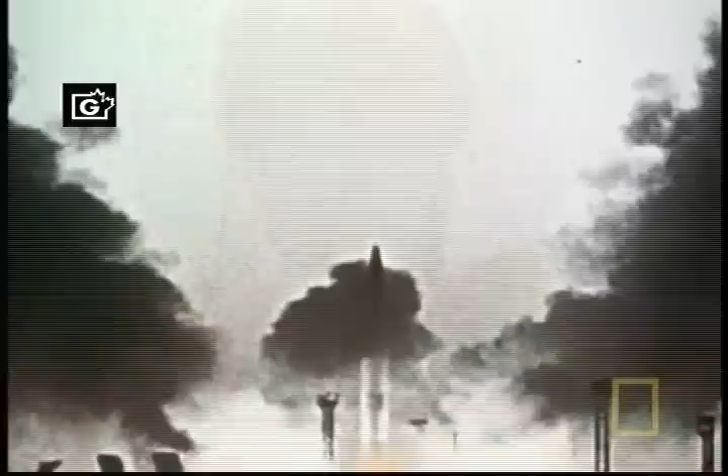It's one of the largest underground military command centers in the world, responsible for protecting the skies over North America, capable of monitoring enemy missiles around the globe, and in charge of deterring terrorists in the aftermath of 9/11. And it's buried deep inside a mountain.

This is NORAD, the North American Aerospace Defense Command Center. Its state-of-the-art computer systems are linked to a worldwide early warning network of satellites, sensors, and radar. NORAD's mission is to track all top-secret intelligence transmitted from this sophisticated warning system. But its top priority is to use that intelligence to monitor the skies for incoming strikes against North America, to assess potential threats, and coordinate a military response, giving U.S. forces enough time to intercept or shoot down the enemy.

Manning this megastructure are about 1,500 military and civilian employees from the U.S. and Canadian armed forces. Their motto is deter, detect, and defend.

The idea for a command center of this caliber first emerged during the tense nuclear arms race between the United States and the Soviet Union. The need for NORAD became critically clear on the 29th of August 1949, when the Soviet Union detonated its first atomic bomb at a test site in Kazakhstan. America's position as the world's leading superpower was now in jeopardy.

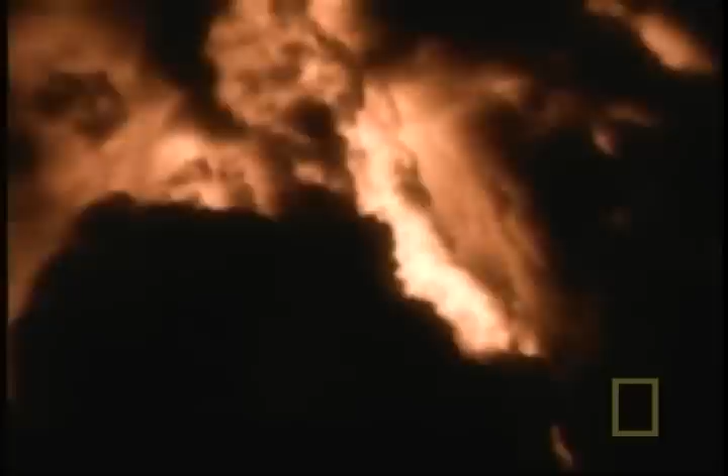To counter the possibility of a nuclear threat from the Soviets, the United States and Canada combined their resources to form the North American Aerospace Defense Command, or NORAD. By 1958, NORAD's detection system relied on a global network of 57 radar sites planted above the Arctic Circle. This was called the Distant Early Warning Line, or DEW line.

But NORAD's nuclear defense had an Achilles heel: the headquarters itself. NORAD was operating out of an old hospital in downtown Colorado Springs. And although it was close to other military facilities, including a U.S. Air Force base, the building, built in 1923, was a vulnerable target.

The commander at the time said, 'There's a problem here. Anybody driving by with a bazooka could knock out this command center.' Military officials were forced to rethink the location of NORAD's headquarters. They needed a protected site and a structure that would be virtually indestructible.

The Army Corps of Engineers was brought in to design a state-of-the-art military fortress. We needed something that would be able to survive a nuclear attack so that we could respond in kind, and the Soviets would know that, and therefore, hopefully, not attack us in the first place.

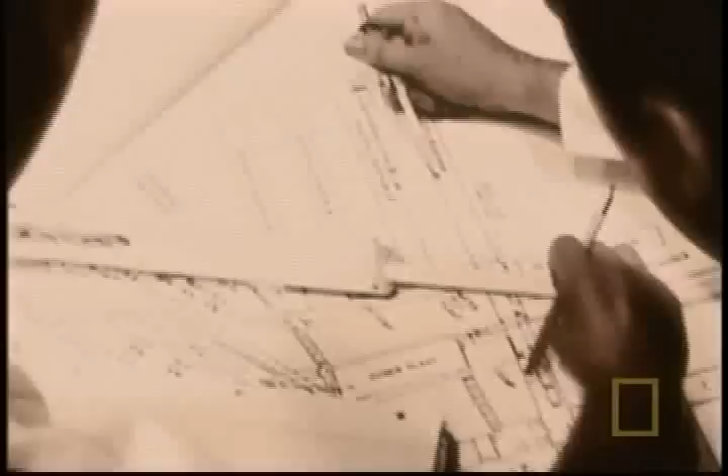The Army Corps of Engineers had been the mastermind behind the Pentagon military complex 17 years earlier, and America's top-secret missile silos in the 1950s. But the concept for this mountain complex came at a time when engineering technology was relatively unsophisticated and limited. In 1958, computers, as we know them today, had yet to be invented. The engineers used slide rules when they built this facility.

The military designers proposed 3 potential locations for the megastructure. They could dig out a concrete underground bunker, like those constructed during World War II. They could erect NORAD inside an abandoned mine. Or they could implement their most extreme design by carving out the inside of a mountain.

2,000 feet of natural solid granite protection convinced the engineers to build NORAD deep within a mountain. The next step was to find that mountain. They began the search in their own backyard, the Colorado Rockies. And soon engineers had narrowed the choice to 2 sites.

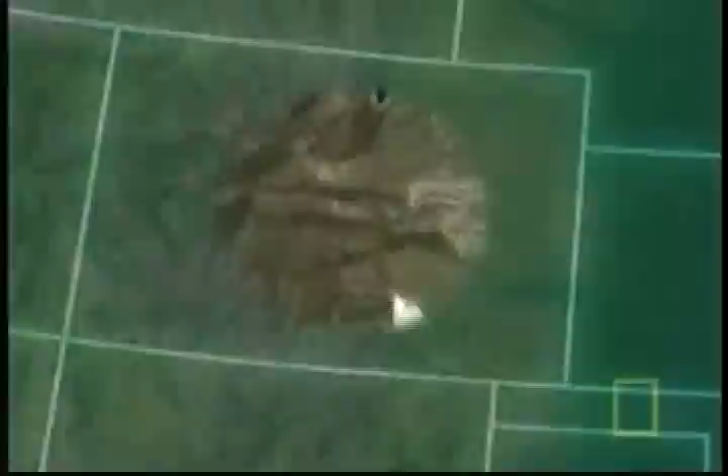The 9,423-foot-high Blodgett Peak and the 9,565-foot Cheyenne Mountain. To ensure they selected the best option, engineers analyzed rock core samples from each mountain, a process that could determine which one would offer the sturdiest protection for this unique underground megastructure.

Helicopter pilots were hired to transport men, generators, and heavy core sampling equipment to the sites. At each location, survey crews drilled holes 3 inches in diameter and up to 1,600 feet deep. Then, using a borehole camera, they photographed the rock structure inside the 2 mountains.

When they did the core samples in Blodgett Peak, they discovered that there was a lot of water compared to Cheyenne Mountain. They had much harder rock and much more consistent rock in Cheyenne Mountain. Because it had a more stable rock structure, Cheyenne Mountain was selected as the future home of NORAD.

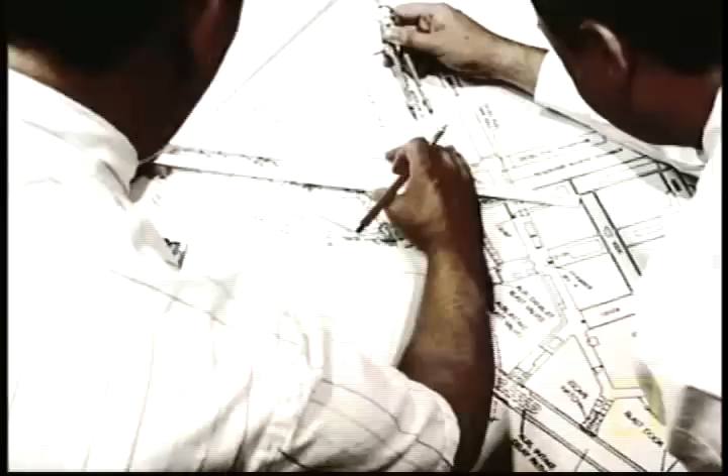Engineers now had to map out the construction project. Phase 1 was excavating tunnels, chambers, and reservoirs inside the mountain to create a 5-acre military installation, big enough to hold 5 football fields. Phase 2 was to build a self-supporting city with 12 interlocking personnel buildings and its own water reservoirs, fuel supply, power plant, and ventilation systems.

Like the Pentagon, this city would be open 24 hours a day. Staff would be stationed at roughly 800 desks and operate about 1,000 computers.

NORAD would also contain amenities like a gym, corner store, and cafeteria. Many of the building's exact details remained under wraps due to the high security protecting this top-secret facility.

But there was one characteristic that set this headquarters apart from other megastructures: the ability to completely seal itself off in the event of a nuclear attack. NORAD would have to be able to function and keep its personnel alive for 30 days without any support from the outside world.

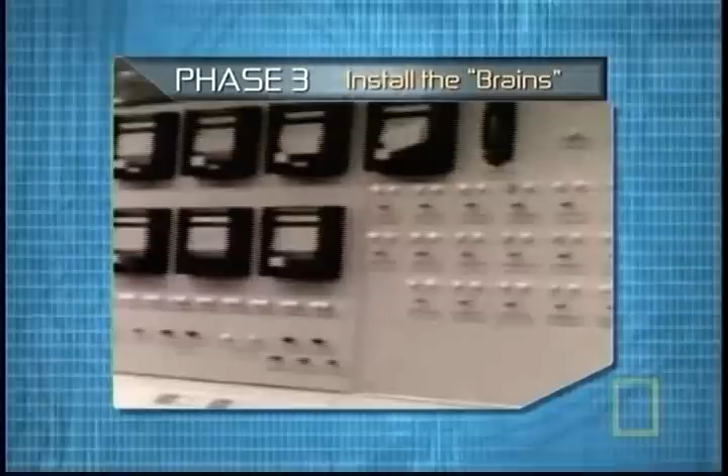For Phase 3 of the NORAD military complex, technical engineers would install a powerful scientific computer linked to a super surveillance system capable of monitoring missile activity around the globe. NORAD was considered a Level 1 facility, meaning this structure would have the highest operational security available.

Building this military headquarters presented a challenge unlike any that engineers of the time had previously faced. 700,000 tons of granite had to be excavated from inside the mountain, a weight equal to almost 4,000 commercial jets, before construction of the buildings could even begin.

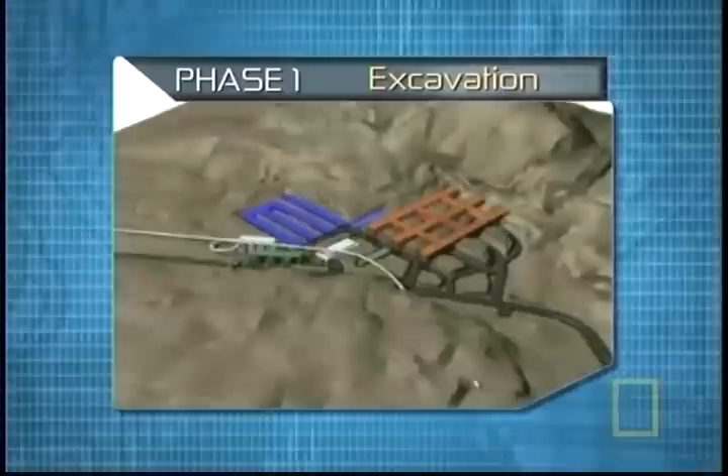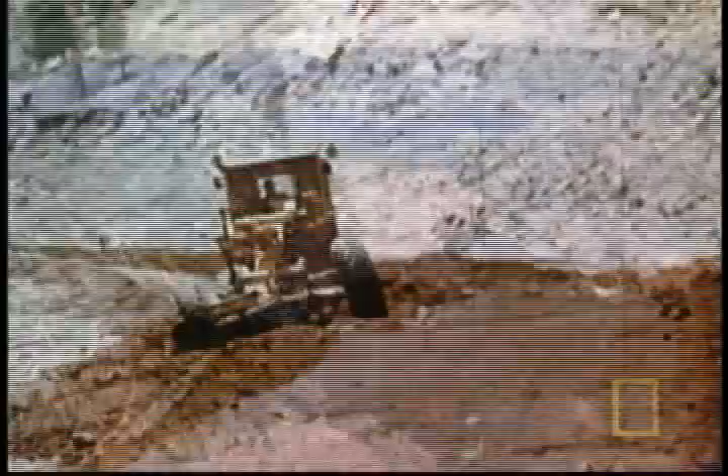By late September 1959, 2 years after the initial conception of NORAD, construction crews hit their first obstacle. Engineers had positioned the North Tunnel entrance 1,000 feet above the base of the mountain. But the site was so remote that men and machinery couldn't access it by land. A 4-mile-long road had to be planned and bulldozed before crews could start excavating the mountain.

It took more than 2 months to complete the road, from its beginning in Colorado Springs to the end point 1,000 feet up Cheyenne Mountain. But by November 1959, just as the new road was almost ready to transport crews and equipment, the entire project came to a screeching halt.

The roadblock this time was money. Congress didn't approve additional funds for NORAD. At the beginning of 1960, with the threat of nuclear war still a frightening reality, it looked as if America's answer would never be built.

In November 1959, all across the United States, Americans were living under a nuclear threat. The US government was building what it believed was America's only viable solution: a top-secret military complex capable of seeing into every corner of the world.

But construction crews had only just finished the $1 million access road when the government shut down the entire project. Estimates to complete the project ran at more than $26 million. Military officials were constantly updating and resubmitting NORAD's initial plans.

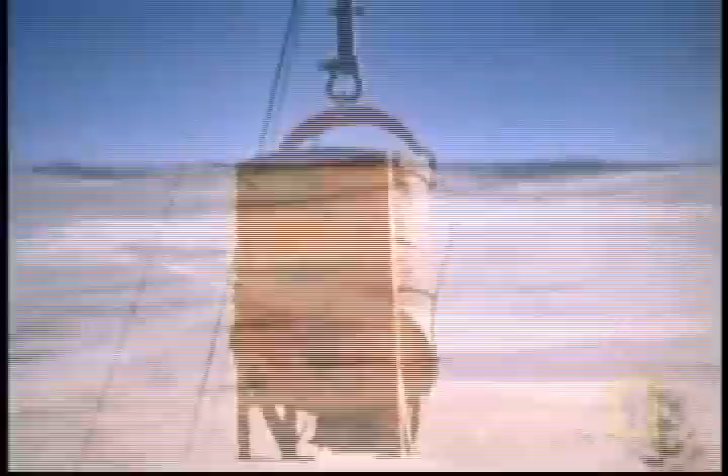It was another 16 months before Congress finally approved the design and funding of this underground megastructure, and construction could begin again.

Once the green light was given, military officials staged a highly public groundbreaking ceremony for their top-secret fortress. This was a message to the Soviets that the United States was taking the threat of nuclear war very seriously.

There was no secret. What was secret at the time, and remained secret really up until the 1980s, was exactly how hardened that facility would be. What kind of a nuclear blast could it survive?

On the 16th of June 1961, top military officials detonated the first blast. 3 interrupted years after NORAD's preliminary design had been drafted, construction finally began. It started with a mammoth dig.

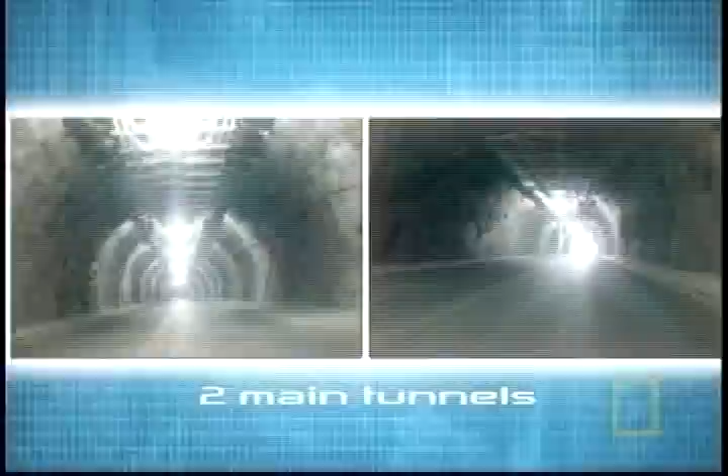A crew of just 90 workers had 1 year to carve out 5 acres and remove 700,000 tons of granite to form 2 main tunnels and 7 60-foot-tall caverns, the equivalent of 5.5 stories.

These hollowed-out chambers would become the protective shell for NORAD's 12 interlocking staff buildings and 3 industrial structures, including a power plant. The total size would be 104,980 square feet. The 2 tunnels would lead to these buildings from opposite sides of the mountain. The first job for the excavation crew was to blast out the tunnels.

From day one, engineers faced one of their biggest hurdles: how to keep thousands of tons of rock and debris from burying the whole project.

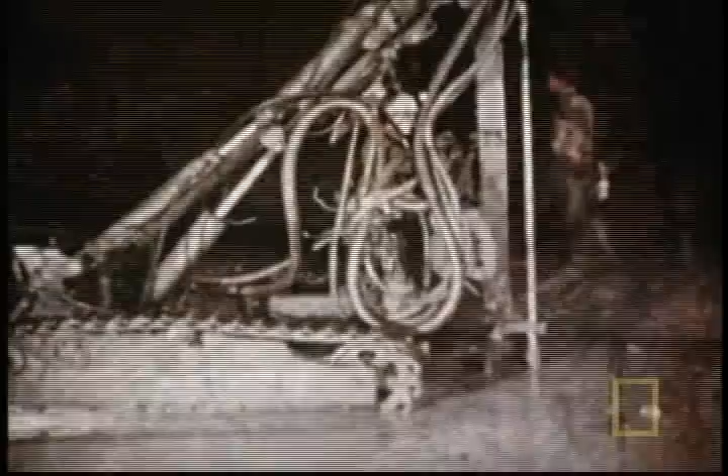Blasting was the fastest and cheapest way to excavate the granite. Miners at NORAD attempted traditional blasting techniques, with dynamite heavily packed into drilled holes. But they soon realized that this method risked fracturing and loosening the rock. In the worst-case scenario, it might cause the cavern ceiling to come crashing down on top of them.

Crews needed to develop a more controlled way of blasting that would keep the walls intact.

Dr. Paul Worsey is a blasting expert who consulted on the NORAD megastructure.

Worsey shows how the traditional blasting method can cause a rock wall to crumble and cave in. All these fractures here are blast-induced, and it's really loosened up. I can even pull the material off with my hands quite easily.

Now, if I could do that with a steel bar, just imagine what the shockwave from a nuclear weapon could do.

To avoid a cave-in, NORAD's explosives team used a new technique developed in 1956 called smooth wall blasting. In this technique, miners first calculate a blasting pattern by painting a series of arched lines on the granite walls. Holes are then carefully drilled along those lines and loosely packed with small sticks of dynamite. Timing is crucial. Each arch must be detonated from the inside out in a precisely choreographed sequence. On the outer arches, the rock shears off cleanly, leaving behind a smooth wall.

Dr. Worsey demonstrates NORAD's smooth wall blasting technique. With everyone at a safe distance from the site, the countdown begins. Fire in the hole! 3, 2, 1!

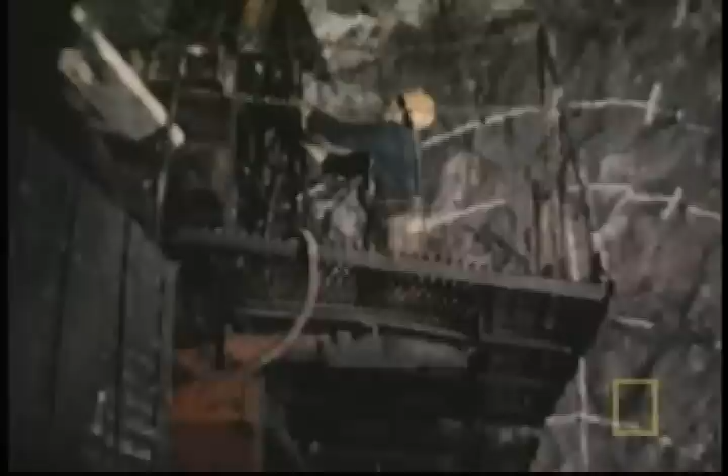Fewer cracks means a more stable wall, which was exactly what NORAD's blasters and engineers finally achieved at Cheyenne Mountain in the autumn of 1961. If they had not used these very innovative, carefully planned mining and blasting techniques, the chances of having a facility that would survive a nuclear blast would have been minimal.

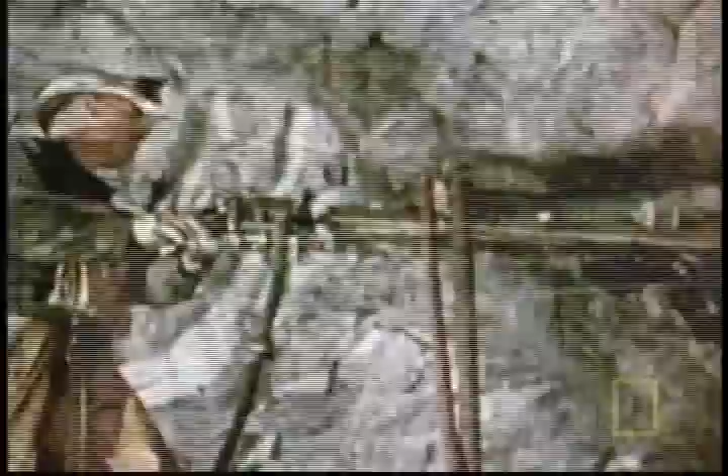The excavation crews still had to meet their deadline of June 1962. So blasters worked in 3 shifts around the clock, 6 days a week, attacking the mountain from both ends. The design plan called for the 2 tunnel crews to meet at a central juncture point. There they would excavate the main cavity for NORAD's 15 buildings.

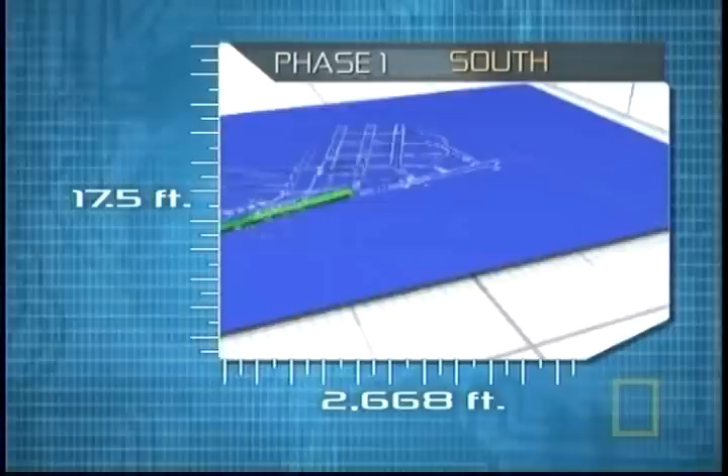On the south side of the mountain, one team bored the access tunnel for NORAD's ventilation system. It was 2,668 feet long and 17.5 feet high. On the north side, another team blasted out the megastructure's main entrance. This was a shorter tunnel, 1,416 feet long and 22.5 feet high.

Blasting, digging, and carving out tunnels thousands of feet long through a mountain took time. No one knew for certain if the command post would be completed before there was a Soviet attack.

On the 13th of August, 1961, the Soviets started to build the Berlin Wall. And 3 weeks later, they began to test a whole new generation of nuclear bombs. The workers at NORAD were now in a race to deter a hostile superpower.

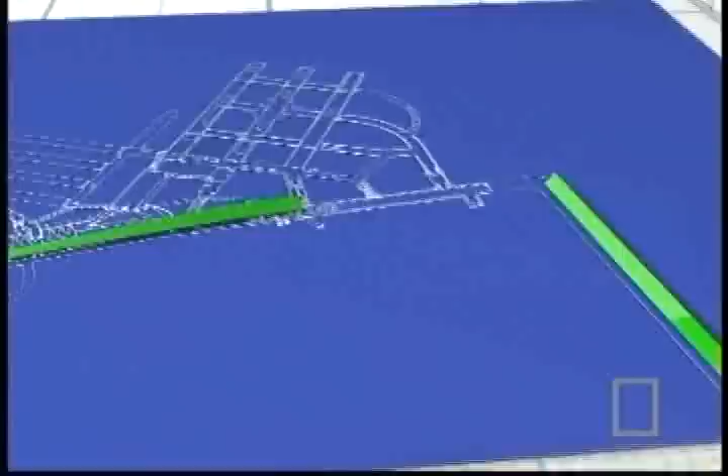Just 3 months after their start date, the workers reached a milestone. On the 7th of October 1961, crews from the north and south tunnels met. Together, they'd carved through 4,675 feet of solid granite. It was a monumental achievement.

But the tunnels were just the prelude to the main event. Digging out NORAD's 7 central chambers would be an even tougher job. And the crew had just 8 more months to finish the entire excavation. It was a daunting task.

And in the heart of the mountain, where the chambers would be hollowed out, engineers were about to hit another major obstacle, one that would threaten to derail the entire multi-million-dollar project.

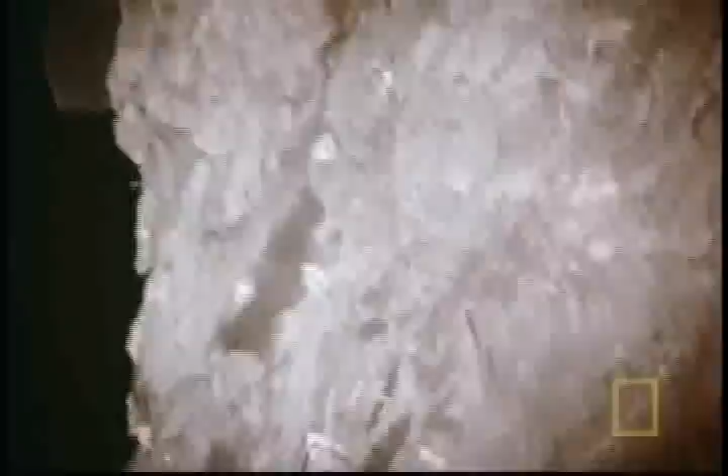On the 30th of October 1961, the Soviets tested the most powerful atomic weapon ever built. It was the 57-megaton Tsar Bomba. Nearly 4,000 times more powerful than the bomb dropped on Hiroshima 16 years earlier.

The blast had repercussions halfway around the world, at Colorado's Cheyenne Mountain, where engineers were constructing a command post that had to be able to withstand a nuclear blast.

Working around the clock, construction crews had carved out more than 6 million cubic feet of rock for NORAD's 7 central chambers. But 3 months into the dig, engineers uncovered a dangerous weakness in the mountain's geological structure.

What they discovered were huge fractures above the 3 main chambers, meaning that even the vibrations of a small earthquake could potentially cause the entire cavern to collapse.

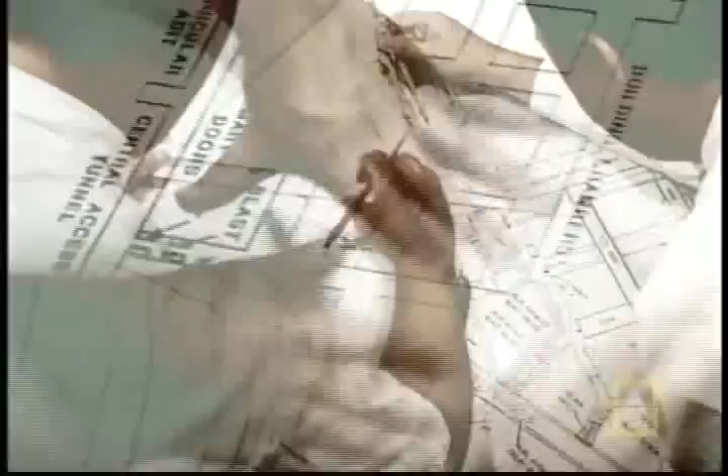Engineers needed to address this new risk or terminate the entire project. They went back to the original blueprints and came up with a radical proposition. They decided to rotate the chambers 70 degrees and reposition the entire excavation project. In this new design, the cracks over the future buildings became shorter, minimizing the effects of an earthquake or nuclear blast.

If they had not changed from the original plan for that portion of the excavation, it's likely that you would have had problems with caving rock, or if there had been a nuclear attack, the vibrations to the entire mountain would cause that to collapse.

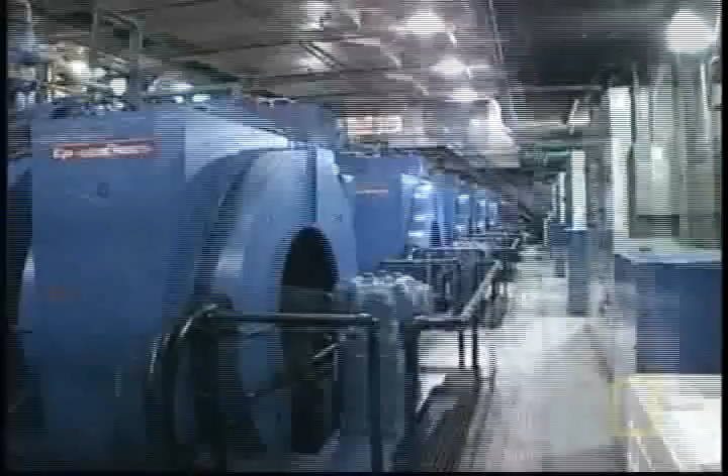With the revamped design complete, construction crews were now ready to carve out the 5 reservoirs. 4 of the reservoirs would hold a total of 6 million gallons of water, enough to fill more than 20 Olympic-sized swimming pools. The fifth reservoir would hold 500,000 gallons of diesel fuel. The surplus would run the 6 generators that provided NORAD's power.

With the reservoirs complete, construction crews were just a few months away from their June 1962 deadline for excavation. But soon the mountain's natural elements presented another challenge for NORAD's blasters. Engineers discovered that large sections of the mountain were filled with water, so much that the miners couldn't possibly pump it all out.

Too much water is a nightmare for blasters, creating fractures in the rock. And miners have no control over the way fractured rock explodes. The miners were forced to find another type of explosive.

They tried out a compound called slurry, made from ammonium nitrate. Slurry can be molded to fit any crevice, so it can fill a hole that's cracked.

But blasting away tons of rock would weaken the mountain's structure. So engineers decided to secure NORAD's unstable granite roof with giant steel rods called rock bolts, measuring between 6 and 32 feet in length, these metal dowels would provide critical structural support.

Rock bolts are really important in tunneling because they're a method of stabilizing the roof. We actually pin loose pieces of roof to stabilize them.

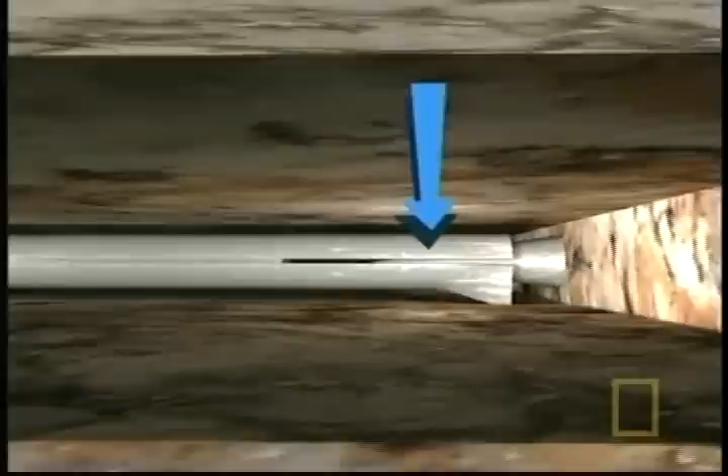Workers installed the steel rods into the walls and ceilings of the chambers. The tip of each bolt had an 8-inch split that held a steel wedge. Compression drove the wedge into the steel rod, spreading its tip and anchoring the bolt against the surrounding rock.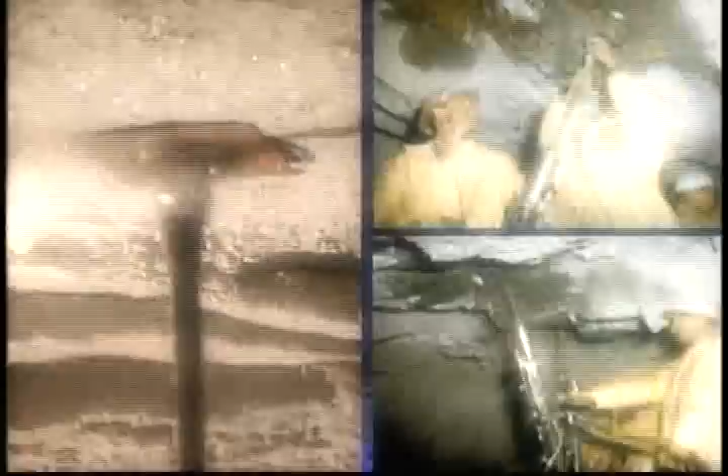Crews inserted bolts 4 feet apart throughout the chambers and tunnels. Each bolt was then tightened against a steel plate on the surface of the rock.

But as the miners continued to carve out more chambers, they discovered that another natural element was also weakening the rock cavern around them: volcanic rock called basalt. Softer than granite, basalt deteriorates and falls apart when exposed to air.

So the miners decided to spray the rock with a concrete mixture called gunite. This hardens into a solid wall and would therefore prevent the basalt from deteriorating.

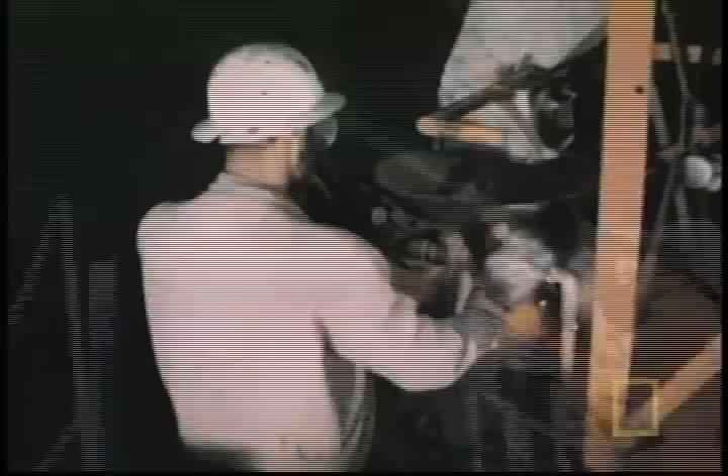With all these unexpected complications, the construction crew struggled to stay on schedule. People were working 6 days a week, basically around the clock, and they knew that national defense, possibly national survival, depended on doing this job quickly and doing it right.

Finally, on the 18th of June 1962, just 2 days after their deadline, workers finished the dig. Phase 1, excavating the mountain, was complete. Almost 1 billion pounds of rock had been removed from Cheyenne Mountain, enough to fill 23,000 dump trucks.

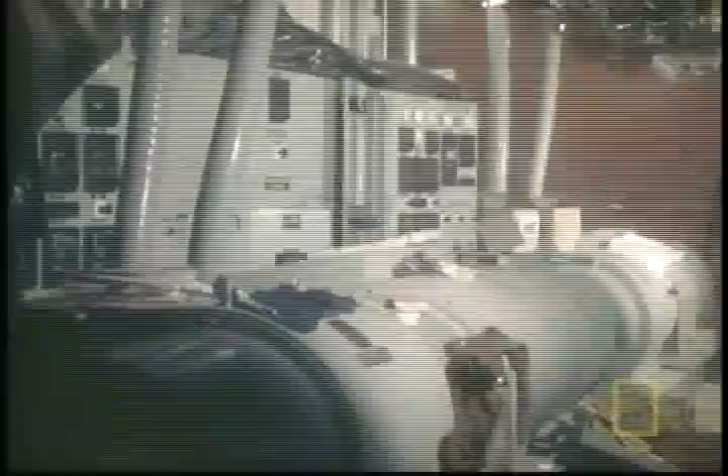Engineers were now ready to start Phase 2 of the monolithic megastructure, constructing NORAD's 12 personnel buildings and 3 industrial structures. 6 generators and a complex ventilation system would also have to be installed inside Cheyenne Mountain.

But what the engineers didn't know was that their plans were about to be turned upside down by the unexpected fallout from a dangerous new weapon.

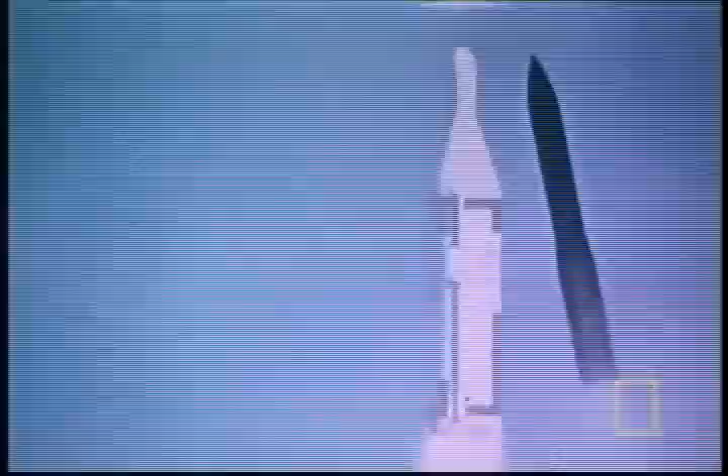By July 1962, construction crews working 2,000 feet inside Colorado's Cheyenne Mountain had carved out more than 5 acres of granite to make way for one of the most important megastructures in military history. Engineers had already completed the designs for 15 buildings that could withstand a nuclear blast. The NORAD Mountain Fortress would be America's first line of defense against enemy threats.

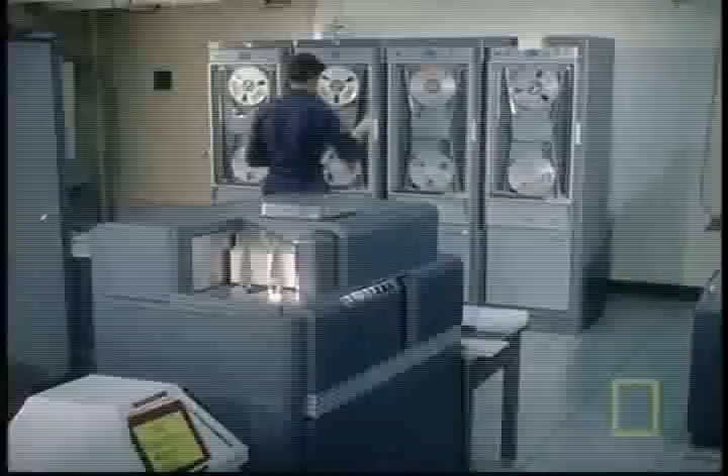But new advances in weapons technology were threatening to neutralize the whole project. On the 9th of July 1962, more than 200 miles above the Pacific Ocean, the US detonated a high-altitude bomb in a nuclear weapons test.

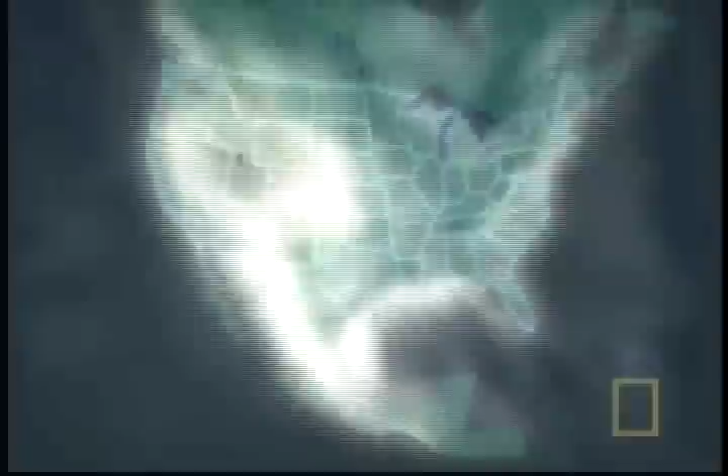An unexpected byproduct of this explosion was a newly discovered phenomenon called an electromagnetic pulse, or EMP. An EMP generated 200 miles above Kansas could cripple the entire United States by preventing electronic devices from functioning. And NORAD depended upon electronics operating around the clock to successfully accomplish its mission of surveillance.

Back at Cheyenne Mountain, engineers realized that even thousands of feet of granite would offer no protection at all against an electromagnetic pulse. The one substance that could ward off the destructive pulse was metal.

Like a lightning rod, metal directs electromagnetic pulses to the ground. But shielding all of NORAD's wires and computers in metal was impossible. If there was even a single gap in the shield, the pulse could short out the entire complex.

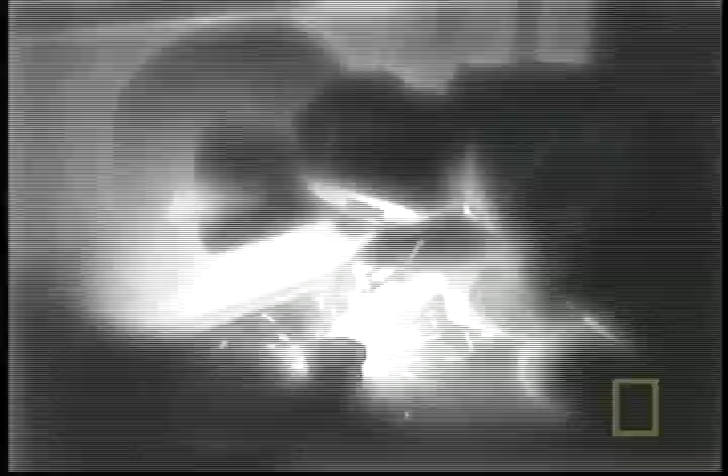Just as engineers prepared to erect NORAD's buildings in February 1963, they came up with a solution. They would construct the buildings themselves entirely out of metal to ground the path of the pulse. Thick steel walls were brought inside the structure in sections, the only way to fit them through the tunnel opening. Once inside, they were welded together at the seams. These steel walls would protect NORAD's sensitive electronic systems by transferring an incoming electromagnetic pulse through the metal to the ground, where it would be absorbed and neutralized.

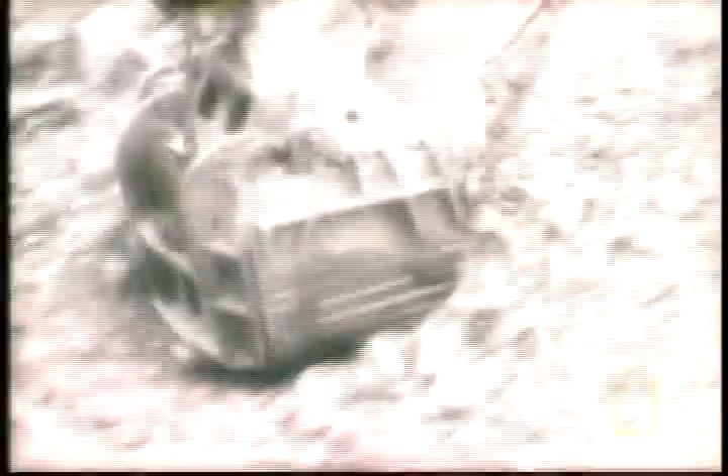Actual construction on NORAD's steel buildings began in March 1963. But 7 months later, the engineers hit another wall. They determined that a geological fault in the roof of the main chamber would not withstand a nuclear detonation.

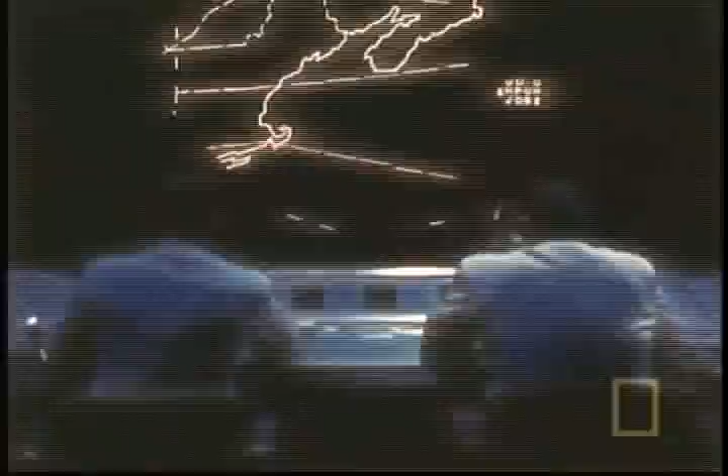They thought this problem had been solved when they'd pivoted the planned structure almost 2 years earlier during the excavation phase, but they were wrong. Even though they reoriented the complex, there was still a crack over part of it, and that caused a great deal of concern. Under this crack was the proposed site of NORAD's most important building, the command center, home to crucial monitoring and surveillance systems.

So engineers came up with a new plan. They would install a giant concrete shell, 50 feet in diameter, just inches below the main chamber's granite ceiling. Its purpose would be to prevent NORAD's future 3-story command center from being buried under tons of crumbling rock. The enormous dome, ranging from 4 to 14 feet thick, was made from steel-reinforced concrete. It would be supported by 4 massive 3-story high concrete columns.

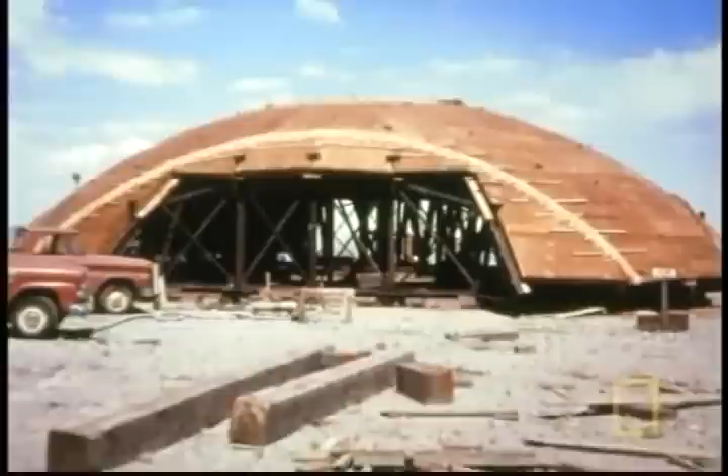It was so large that it had to be fabricated outside the mountain and transported through NORAD's tunnel entrance in pieces. Workers used hydraulic jacks to reassemble it inside the mountain, lifting it into place on top of the columns. To stabilize it further, the dome was fused to the cavern's ceiling. 6 months later, the dome was assembled and in place.

The construction of NORAD's main buildings was now the top priority. But there was still one other menacing phenomenon to tackle. In a nuclear blast, the mountain would transmit shock waves directly to the buildings, injuring people and damaging sensitive computers.

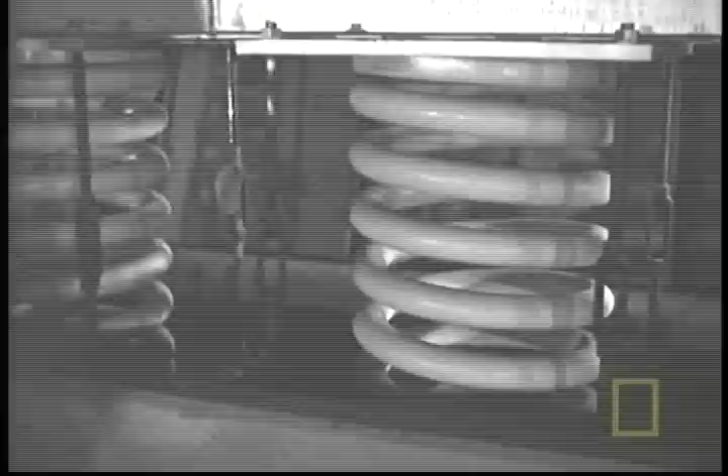To combat these waves, engineers came up with their own version of shock absorbers: giant springs 3 feet tall, nearly 2 feet wide, weighing half a ton each. 1,319 springs would protect NORAD's buildings from shockwaves. This was a first in engineering history. No other structure had ever employed such an innovative shock absorption technique.

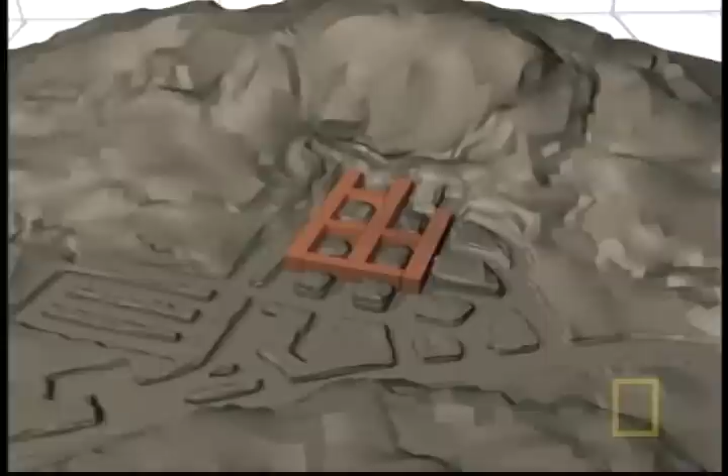Step by step, work on the rough steel structure of NORAD's interior buildings continued. When complete, the buildings were all interconnected to form a basic grid pattern. It was inside this building, the Command Operations Center, that technicians eventually installed the brains of NORAD, its global surveillance system. In adjoining buildings, workers constructed other features of the megastructure, including a medical clinic and a shop.

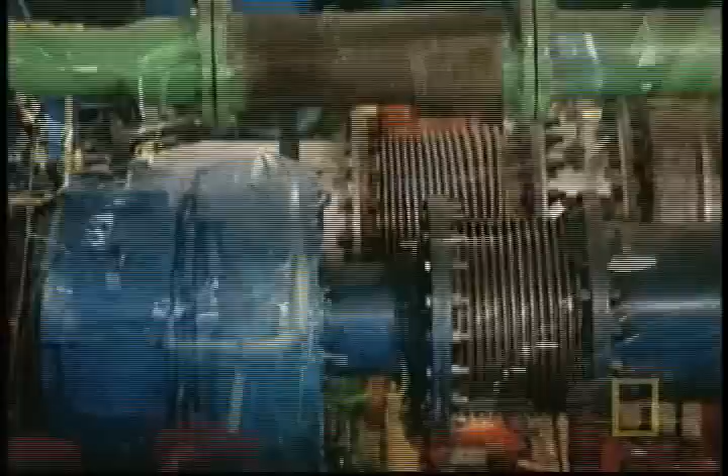In April 1964, workers were 14 months into building NORAD's self-supporting city. The 15 buildings were complete, and crews now began work on the support systems. First, they built the power plant that would run the entire command post. At its heart were 6 turbocharged diesel engines, the same kind used to power battleships. Together, they could generate 10 megawatts of electricity, enough to power more than 1,000 households.

Next, crews loaded fuel and water into the 5 reservoirs they'd already carved out. One reservoir held 1.5 million gallons of water for drinking and cooking.

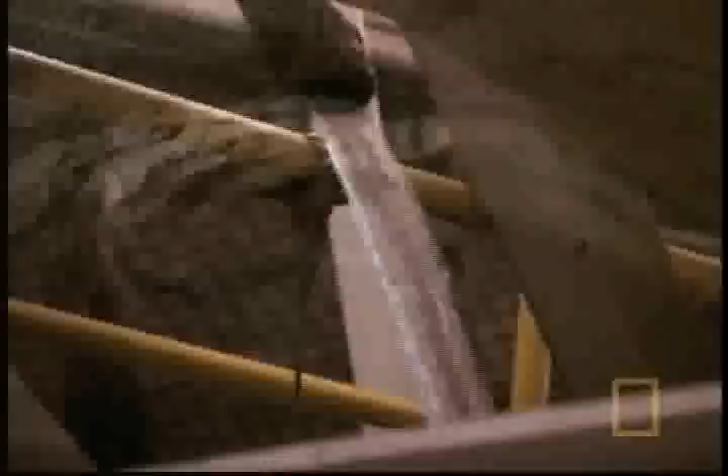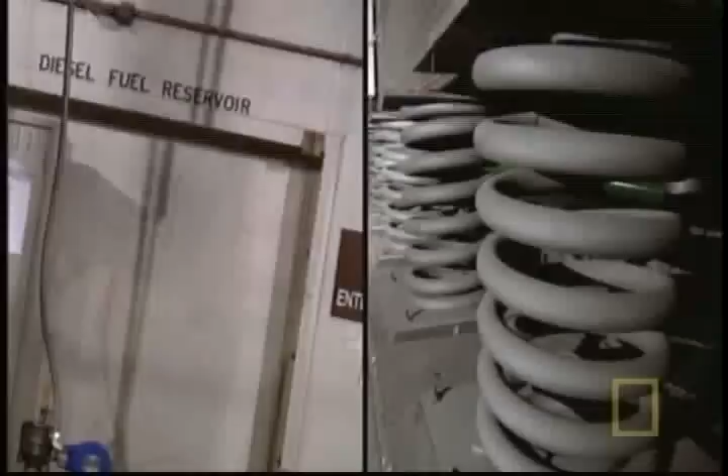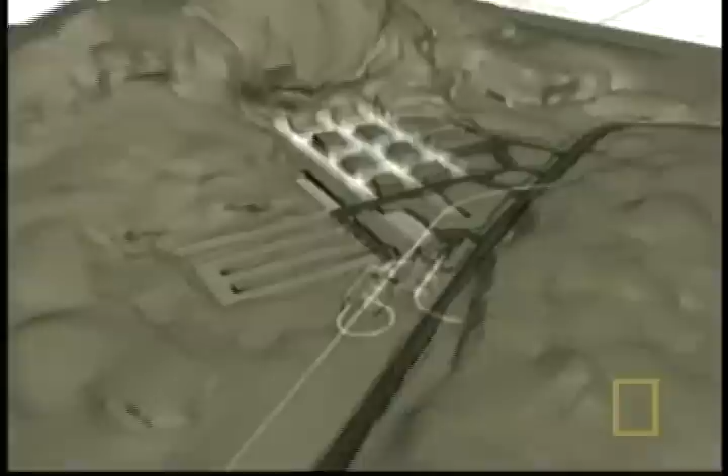In the 3.5 years since NORAD's first official blast of dynamite, workers had overcome all kinds of obstacles. But the NORAD facility was still vulnerable to one lethal menace: radiation from nuclear fallout. By early 1965, the first 2 phases of the NORAD command center were near completion. The tunnels, interlocking buildings, 4 water reservoirs, fuel supply reservoir, power plant, and ventilation system had all been constructed. But before the 3rd and final phase could begin, installing the technical equipment that would be the brains of this military megastructure, one last detail had to be addressed.

In the event of a nuclear explosion, damaging shock waves and thermal radiation could enter NORAD through 3 routes: the air intake delay ducts and the 2 tunnels. The tunnels were designed as blow-through areas, so shock waves would travel in one way and out the other. But the air ducts led directly into the NORAD complex. If a thermonuclear shockwave got through these ducts, it could destroy the buildings.

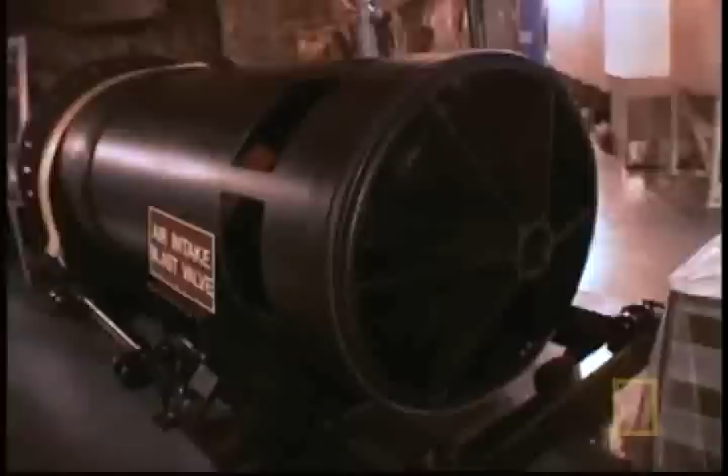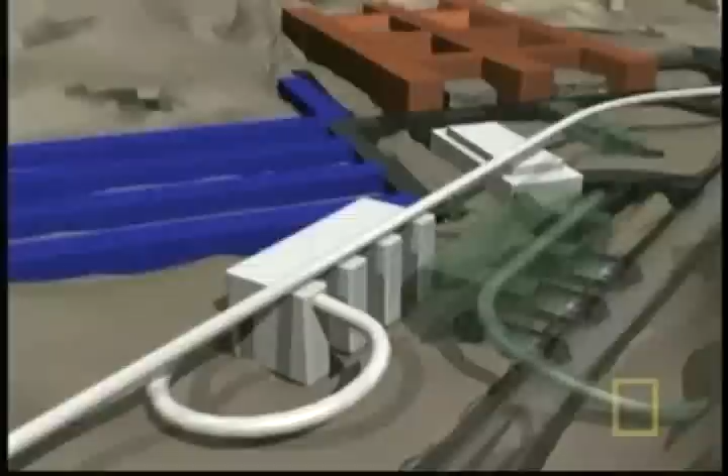The solution was to create a safeguard called a blast valve. NORAD has 58 of them, weighing 8,500 pounds each. Inside this 4-foot wide tube is a movable seal that opens and closes the valve. In the event of a nuclear blast, this creates a change of air pressure. In less than half a second, NORAD's blast valves automatically seal the air intake ducts leading directly to the facility. The contaminated air is then forced through a filtration system called a CBR filter. The fresh air that comes in is forced through those filters where we ensure that no radiation, no chemical agents, or biological agents could get through into the complex.

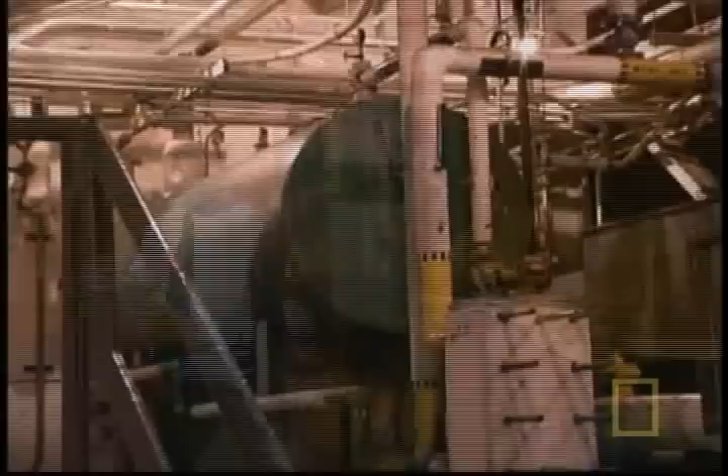But there was one more weakness at NORAD that engineers needed to address: the entrance doors into the complex. Located along the tunnels, they had to be able to seal off the facility during a nuclear blast. For this, engineers borrowed from a different design. The inspiration for their solution was a typical bank vault door. Engineers created a mega version they called a blast door.

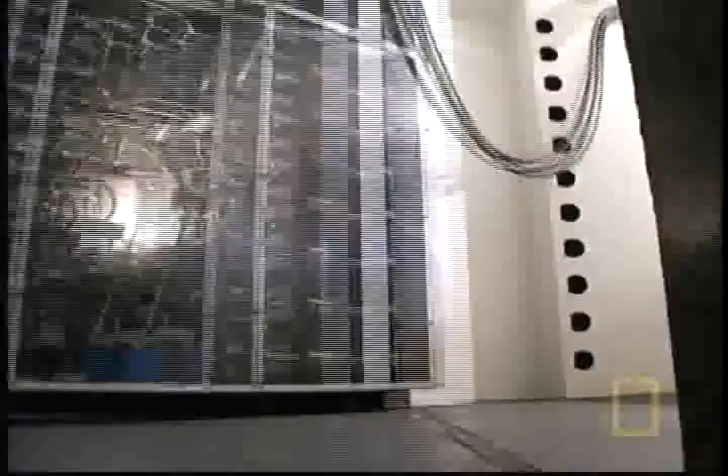It's 3.5 feet thick and weighs 50,000 pounds. Hydraulic motors push a series of steel pins into the door frame for a lock more secure than any bank vault. Like the blast valves, the blast doors close automatically when a nuclear explosion creates a change in air pressure.

With a lockdown system in place, NORAD was now equipped to seal itself off in the event of a nuclear war. The complex would stock enough water, fuel, and food, including 72,000 meals, to continue its mission for a full 30 days without any help from the outside.

By late autumn 1965, all of NORAD's 15 buildings were assembled. The first 2 phases of construction were complete. It was now time to launch the final phase of the project: installing the early warning and surveillance system inside the command center of the new NORAD megastructure.

Although the details of this intelligence were classified, NORAD made no secret of its primary mission: to track aircraft and missiles launched by known or suspected enemies. It would be up to those manning this megastructure to identify any airborne weapons entering North America's airspace.

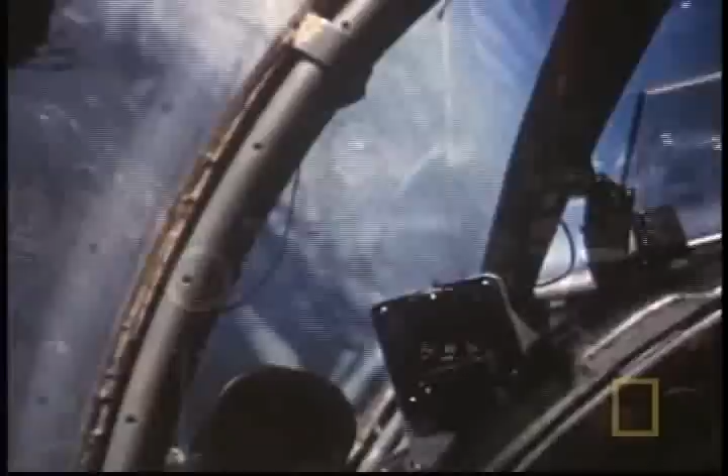NORAD was a statement to the world, in particular to the Soviet bloc, that the United States could be attacked, but they'd reply with a big stick. For 20 years, NORAD scanned America's borders for airborne attacks from the Soviet superpower. Then, in November 1989, the US's greatest foe, and NORAD's primary reason for being, came tumbling down.

The Soviet Union, the enemy that moved North America to build an indestructible fortress in the first place, collapsed. The Cold War officially came to an end. Many people thought that with the Cold War over and less possibility of an attack from outside, NORAD was obsolete. But as the world situation changed, so did the mission of NORAD.

NORAD then expanded its mission of global surveillance to include missile threats from rogue nations like North Korea and Iran. Soldiers watched and warned of missile attacks from terrorists anywhere in the world.

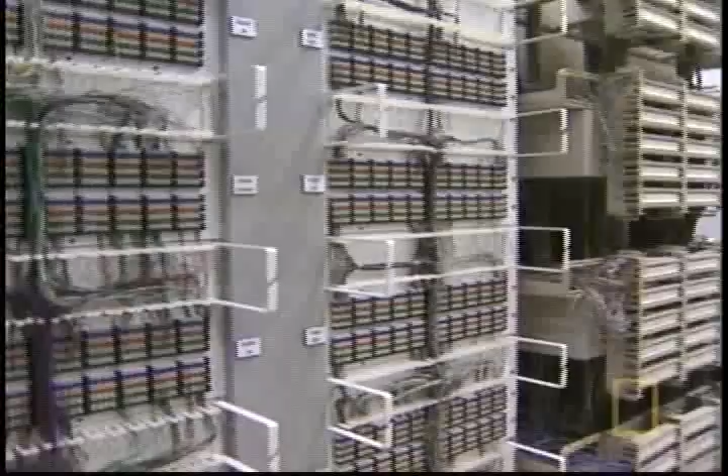It was a mission that depended on complete overhauls. It'll be like a Volkswagen - it always looked the same for years and years, but they kept fine-tuning the engine, changing some things on the inside. Well, that was what they said about the mountain. The mountain will always look the same from the outside, but we'll be fine-tuning it and changing it on the inside to adapt to current needs.

These needs require the brains of NORAD, its top-secret supercomputer, to be constantly upgraded and updated.

Even though NORAD's surveillance systems were powerful enough to detect a 4-inch-long object in Earth's orbit, the command post wasn't prepared for the tragedies of September 11th, 2001.

On the morning of 9/11, we received intelligence that there might be an airliner specifically headed for Cheyenne Mountain. We closed the blast doors that day. The attack on NORAD turned out to be a false alarm.

But the terrorist attacks of 9/11 forced NORAD to update its role and mission once again. It was imperative that they revamped the center to prepare for, and more importantly, prevent, unpredictable acts of future terrorism. The threat has become much more asymmetrical - terrorism is out there now. The threat is no longer a bear, but it's a ball of snakes.

On March 4th, 2005, NORAD officials unveiled their largest renovation since the mountain fortress first opened in 1966: their newly refurbished command center. It was rebuilt within the existing rock chamber carved out more than four decades earlier.

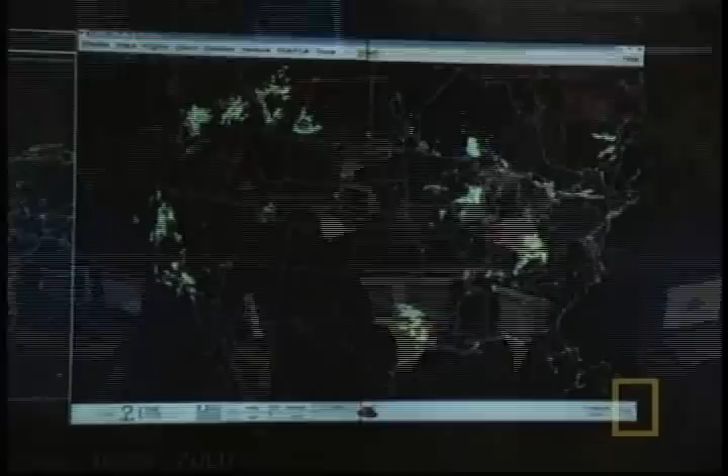As a central command headquarters, NORAD's job is to assess the threat and coordinate the military force necessary to intercept or destroy the enemy.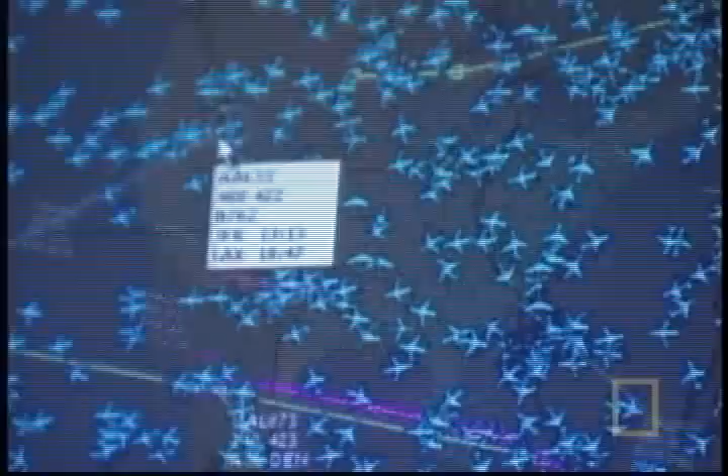Officials now keep an even closer watch over the skies above their homeland. Every day, more than 10,000 aircraft are in the air over the U.S., and ever since the unforeseen airborne attacks of 9/11, any one of those planes could be a lethal weapon.

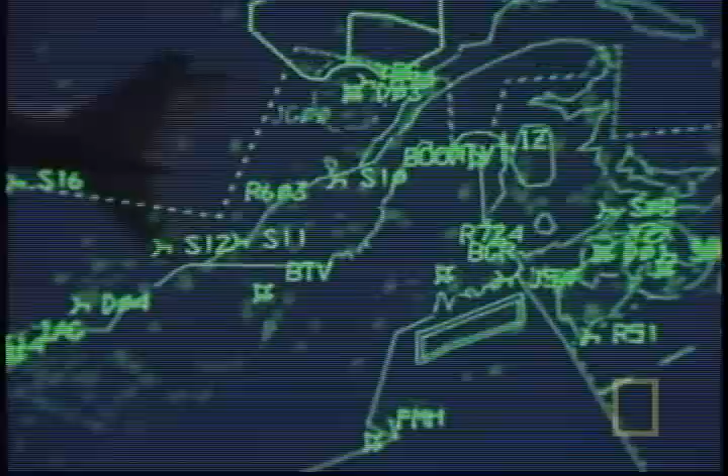We are the agency of last resort, and we really don't want to be involved - if we are, then it's gone too far already. That said, a quiet day here is a good day for us.

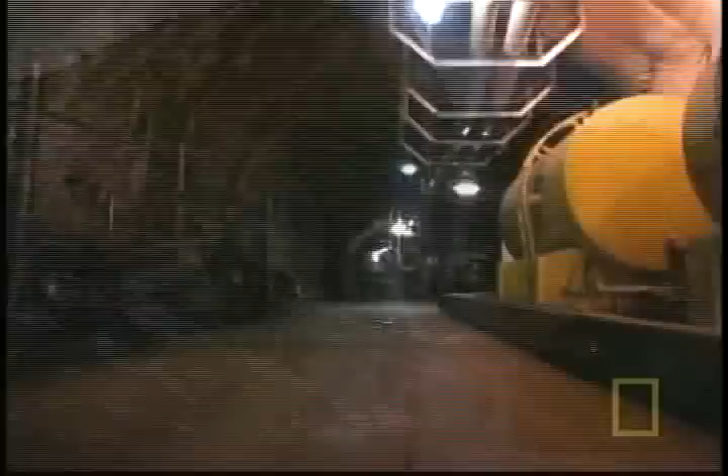NORAD's mountain fortress was built to pass the ultimate test: to survive a nuclear catastrophe. A test it may never face because it's fulfilled its mission so well. This is the most secure place you can be anywhere in the world. It's a remarkable claim for a stronghold that's almost 40 years old.

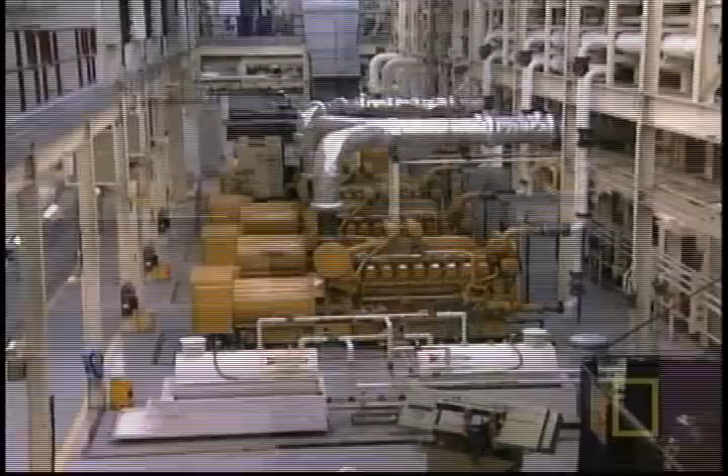The engineers who designed it had a unique vision: to build a garrison where people could see out into every corner of the world, but where no one could see in.

Hidden beneath 2,000 feet of solid granite, this military complex has faced many challenges over the years, including the rapid progress of computer technology, the unpredictable nature of an almost 2-mile-high mountain, and the persistent threat of random acts of terrorism. But NORAD has kept pace with cutting-edge advances in global warfare. This military megastructure keeps a constant watch over the safety of America and the world.